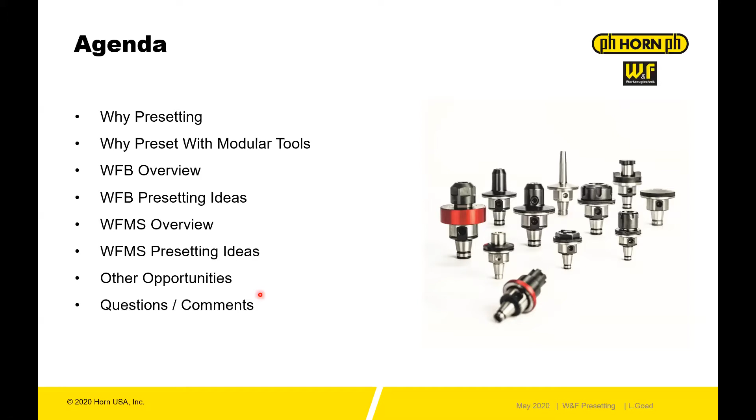So what are drivers that cause tool changes? We've just listed 3 basic ideas. One could be the control of the machine.

When the machine reaches a certain cycle, runs a certain amount of cycles per tool, it can be set in the machine to alarm out and notify the actual operator to change out the tool.

Another one could be surface finish and size. That's typically controlled by the operator. During inspection, he may see some subpar finishes or non-conforming sizes, and he'll decide to change the tool or flip the insert that's controlling that particular size or finish. Another option that could cause tool changes: tool wear detection systems.

The Piezo system is an example of one. With the Piezo system, there is an adapter on the actual tool holder itself in the machine. This adapter is sensing vibration, tool pressure, things that would cause tool wear, or it's just sensing those. Once it reaches a certain limit, it communicates to a smart box, which smart box therefore communicates with the actual control of the machine to notify the operator that a tool change is necessary.

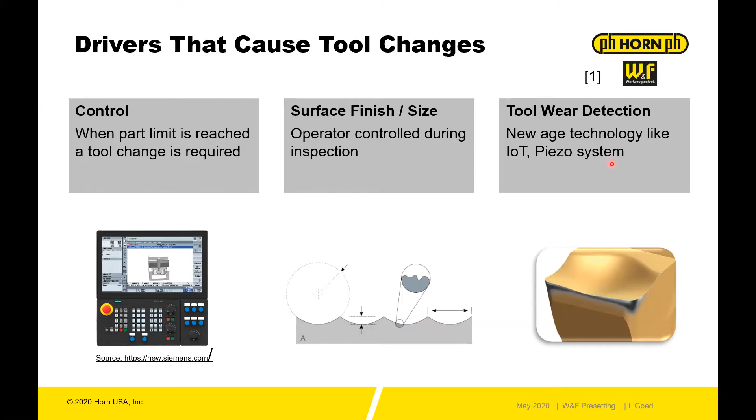What about with presetting? Maybe you have some W&F micro stick tools already preset, and the adapters are available with preset dimensions. A typical tool change from what we perceived would take 2 minutes per tool at 3 times per day, same numbers as far as how many per machine. That would equal up to 12 minutes a day of machine downtime. At a shop rate of $60 an hour, that's $12 a day per machine. Across 4 machines, $48 a day, or $960 a month in just machine downtime lost.

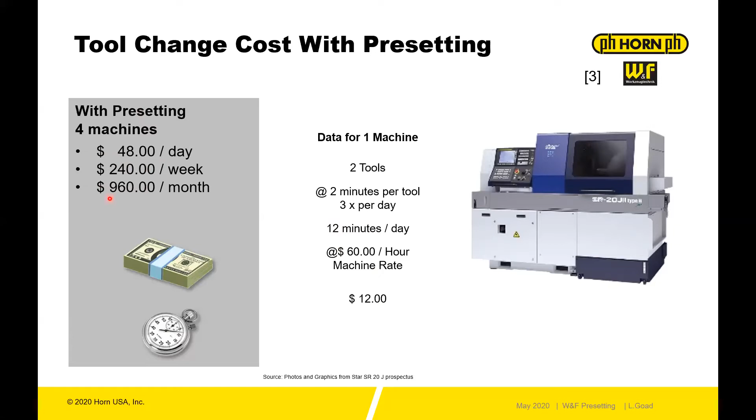So let's look at what you could save by going with a presetting setup across 4 machines: $312 a day, $6,240 a month. This is just the difference between the two slides of without presetting and with presetting, numbers we deemed pretty accurate for tool changes. In time, that's 5.2 hours a day across 4 machines, 104 hours per month you'd gain back in machine uptime. As 8-hour shifts, that's 13 shifts a month a customer could gain back by simply going with presetting 2 tools across 4 machines.

We believe there are distinct advantages with the WFB modular and presetting approach. With the modular system, you only need to clean 4 surfaces on the adapter and 4 surfaces on the basic tool holder in the machine. Versus a stick tool, where you're removing the tool out of the machine, cleaning the wedge clamps, cleaning the pocket where the tool was sitting, cleaning the actual tool itself, flipping the insert, reinstalling, and hoping you didn't get metal shavings or dirt between the tool holder and locating surfaces inside the machine. So there are clear advantages to the adapter, only having smaller surfaces to keep clean when installing, uninstalling, or changing a tool.

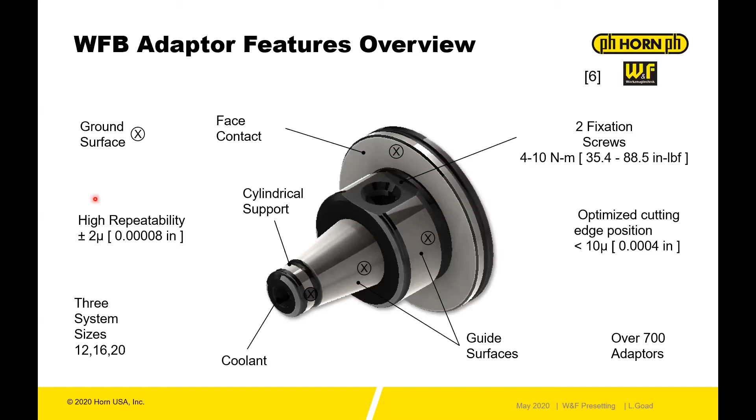We just wanted to show you a little bit of how the process of seating an adapter would work in a basic holder. This area is something I'd like to point out: the face contact area is slightly concave, and that becomes more important when the adapter is seated fully against the basic tool holder.

As you can see, the deeper the adapter goes into the basic tool holder, the more prominent the guide surfaces become for final alignment and proper seating of the adapter itself. Once the adapter is seated up against the face contact areas of the holder and adapter, you torque the threaded taper pins at the recommended value, and at that point the concave face will actually start to flatten out, causing a nice positive locking style clamp. It's also great for exacting and repeatability on the length offset side.

With this, we've put together a little bit of some presetting ideas, and we wanted to cover the WFB first. We gave a simple idea of an ER collet holding any given drill or small end mill, a static holder, a height gauge, a surface plate, and an in-house made tool block. Most customers have round stock laying around so they could turn and grind these surfaces parallel and flat, and then bore a perpendicular bore to the parallel surfaces to the static holder's desired diameter, and clamp it inside this block with a simple set screw.

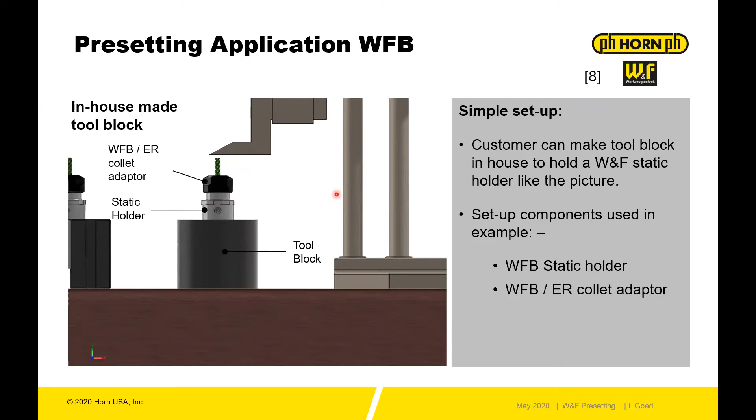Another example would be using a V-block. Most machine shops have a V-block, a height gauge, and a surface plate available. You could simply test the theory by clamping the static holder into your V-block, taking similar measurements off the face contact area, measuring off the top of the tool. Then you're ready to have numbers that can translate to the machine in their length offset, as long as the base holder is set up in the machine.

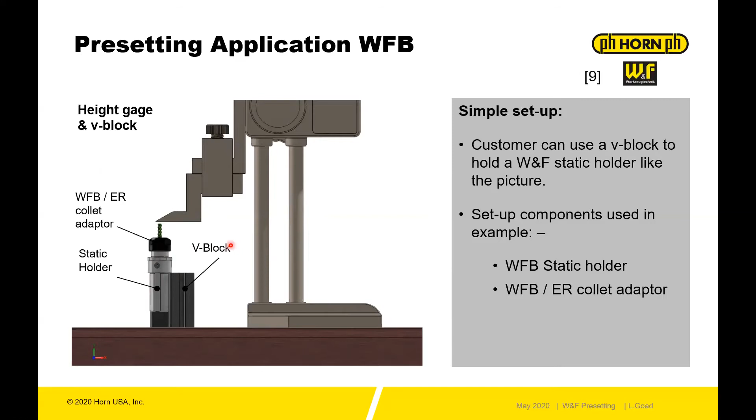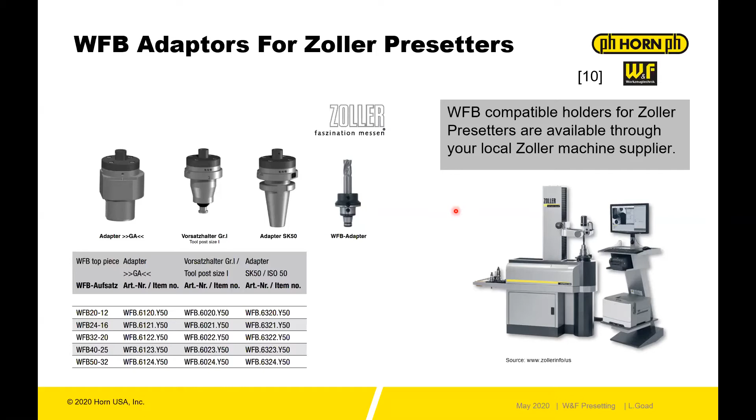You could have a box ready, full and preset with known values of an ID groover, ID profiling insert, ID groove milling, any kind of tool that would fit in a hydraulic holder. So we believe you could definitely save time with having preset tool packages put together, waiting at the machines when the lots are done.

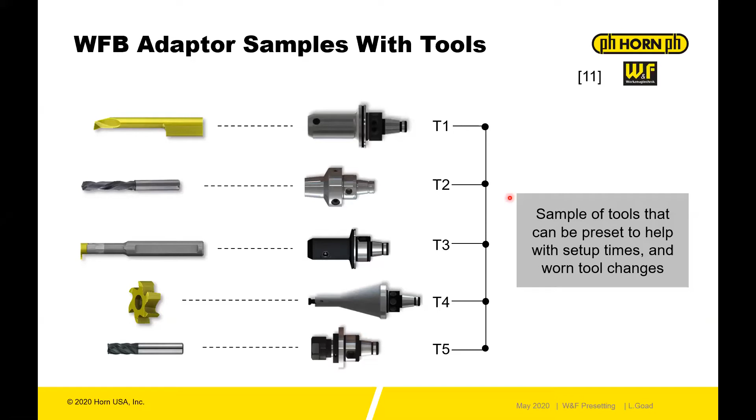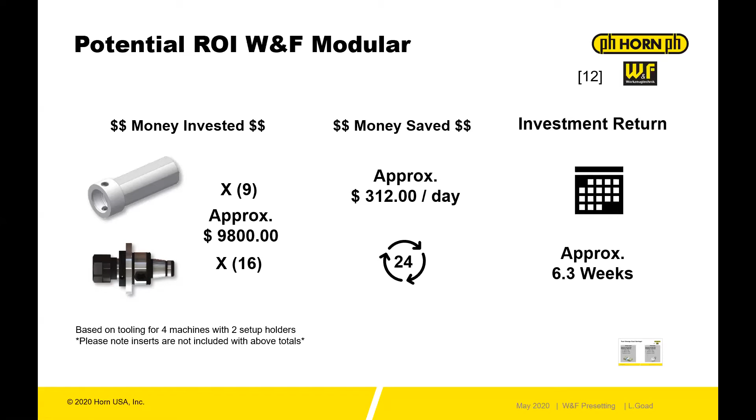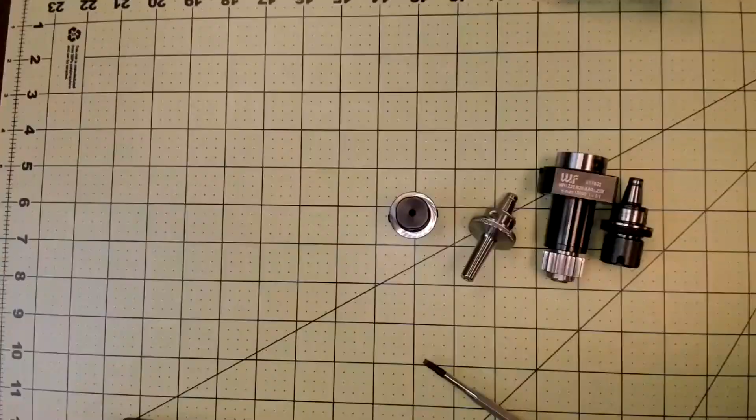Okay, so now we're going to do a live demonstration. All I'm going to do, I know we did this in previous shows, but we're just going to go over the WFB adapter and tool holder basics again, just so you can see them and put together the ground surfaces, and hopefully it will help you understand a little bit more on why presetting is possible with the WFB adapters.

Thank you for bearing with me, I had to do a quick screen change. Right here we have just a basic round shank WFB20-12 compatible tool holder. Some of the features for this are, let's see if I can get this to zoom properly... some of the actual features for this are a through hole, if you can see the hole through the middle.

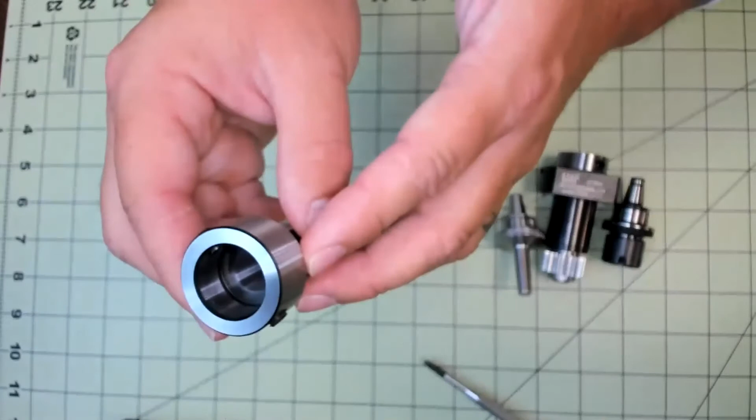Any of the contact areas, like the surface contact area, is ground. You can see the guide surface is ground. The 2 threaded taper pins, 4 clamping flats. These clamping flats will actually help you, let's say you needed to position the threaded taper pins a certain way. You've got options to help put the threaded taper pins in an optimal position for when you change adapters.

Also keep in mind that this style adapter would plug into a standard lathe if you had, per se, a 114 or a 105 face grooving operation that you wanted to include into just a typical lathe.

Another thing I wanted to cover, of course, is the adapters themselves. Again, you can see the through bore. This is a 3mm style shrink fit adapter. As you can see, all of these surfaces are ground.

There's the 2 threaded taper pin bores. And when the threaded taper pin clamps, it actually pulls back on this area, pulling the adapter into the basic holder.

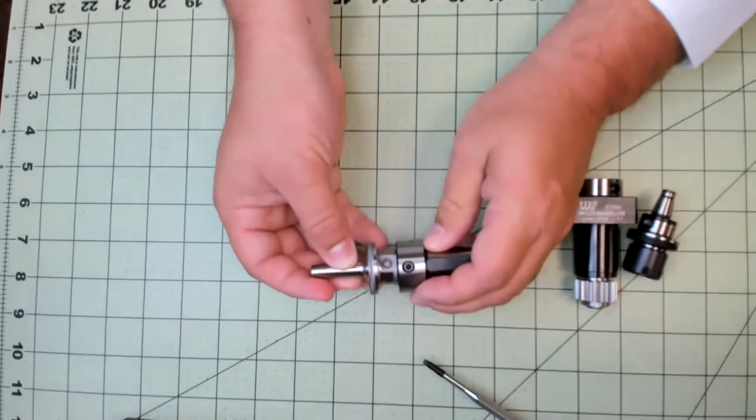Everything's a nice fit. You would snug these 2 threaded taper pins down, as covered in previous presentations, then break them loose once again, and do your final torquing for proper seatment. The WFB 20-12 is 4 Newton meters, so very low torque values have actually produced proper seatment.

Another adapter would be an ER style collet, as you can see, a through bore for through coolant. All the plane contact areas are ground. Again, real easy to install. You torque the 2 threaded taper pins down, and you're ready to go.

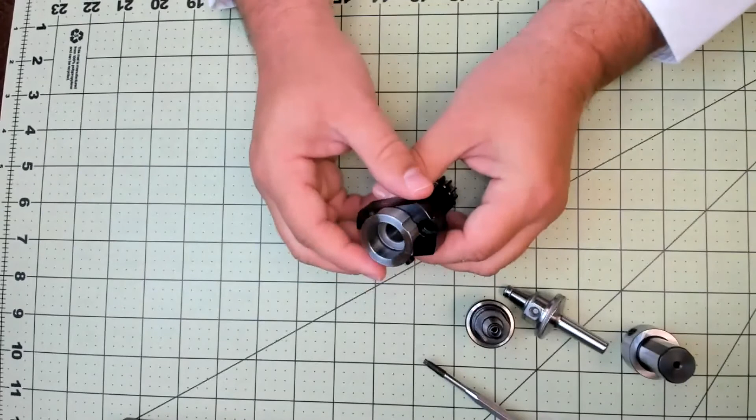One last thing, we believe you should be able to, even with live tools preset, because these are plane ground, plane contact areas, easy to rotate for the 2 different threaded taper pins.

This is for an L20. Let me get it turned the right way. This is for an L20 Citizen. W&F has partnered with Citizen to get the proper gear information, proper bolt hole information, proper flange width. This way you can stack several tools together without any interruptions or having to skip pockets. So definitely lots of good advantages to the WFB system.

Definitely, in my opinion, these are made for presetting.

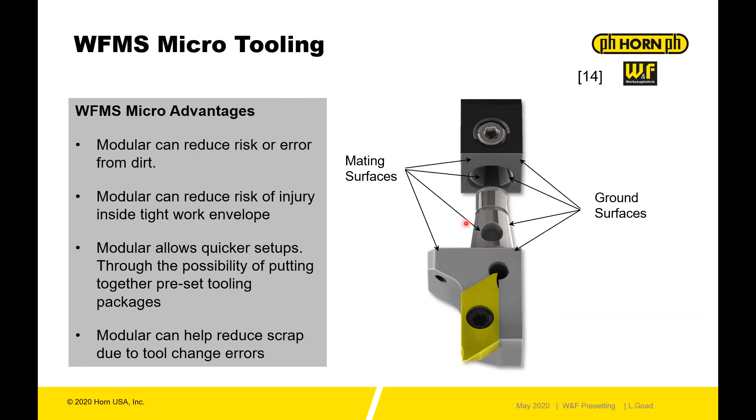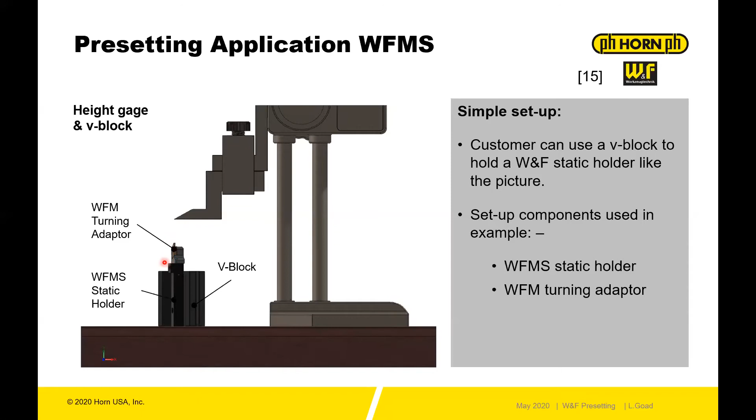So what kind of return on investment would you see? Well, again, this is 4 machines, 2 tool holders in each machine. You would need 9 basic adapters or tool holders - 8 in the machine, 1 outside for presetting - and 8 adapters in the machine, 8 adapters outside of the machine for presetting. $7,800 is approximately what it would cost to totally tool up 4 machines, or to tool up 2 tools per machine.

We believe you'd see $312 a day in return machine uptime. It would take approximately 5 weeks to see a return on your investment.

And where did we get the numbers from? Well, again, if you can remember in slide 4, this was just basically the difference of with presetting and without presetting across 4 machines.

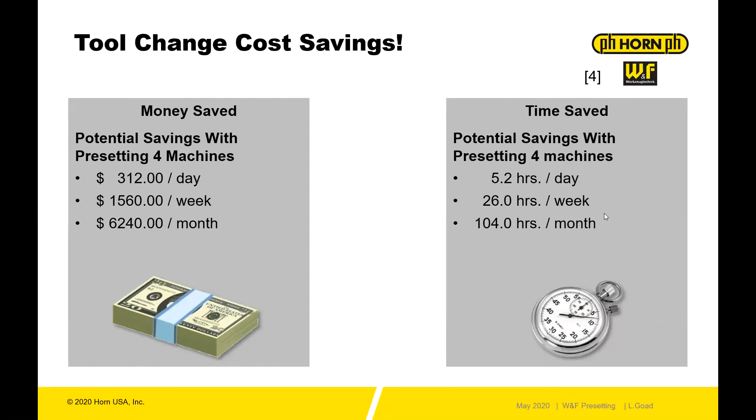Uh-oh, we have hit some technical difficulties. I apologize, let me get to the proper slide. It may be kind of a blur, so if you deal with any kind of flashing light issues, please just bear with me. My slide didn't zoom properly.

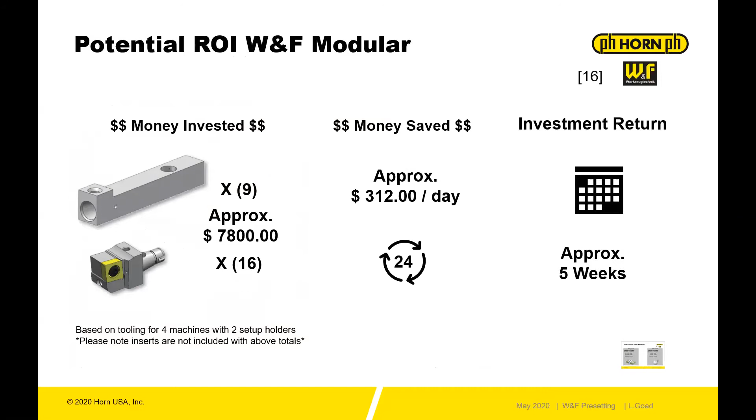But nevertheless, we're back to the presetting. I wanted to just bring you back to this slide for the return on investment so you can see what we would see back in time gained on the machine.

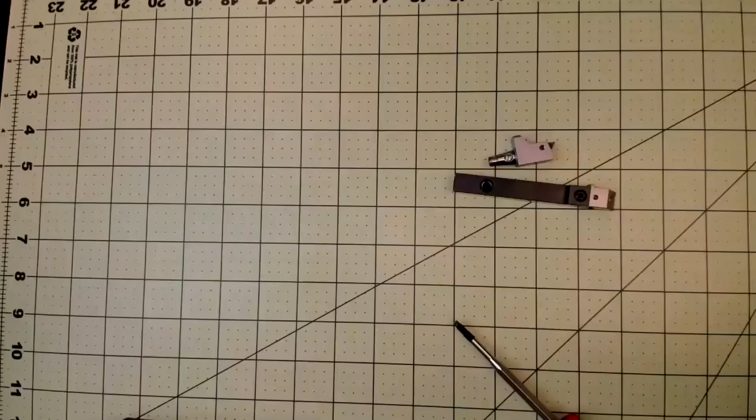Okay, so we're going to take a quick brief break and do a live demonstration. Bear with me as I change my screen share. We will go to my secondary camera, and basically all we're going to do is have a micro tool holder and just kind of show some of the features and what we believe are benefits.

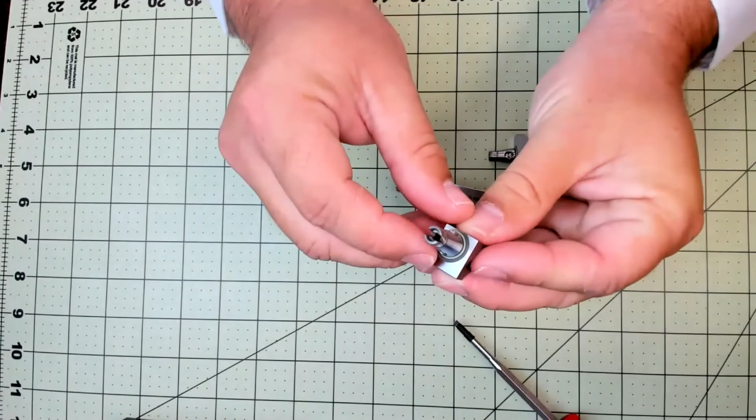Just a basic turning adapter, ISO style. With the adapter, you can see the ground surfaces, base contact, ground surface area. The O-ring itself is to help with pushing the adapter off after it's been installed - it actually helps push the adapter off when you loosen the threaded taper pin. There's the threaded taper bore, and they offer two, so depending on the location in the machine, you could actually flip the insert to be facing down or facing up, depending on your application needs or location of the tool holder.

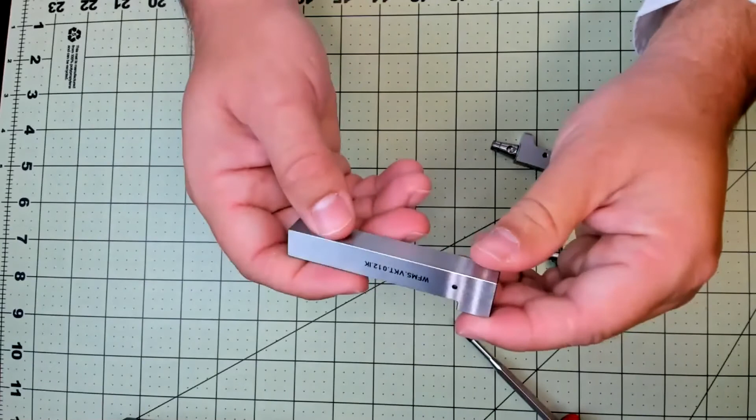The tool holder itself - as you can see, the contact or locating areas that control center height and location of the actual adapter are all ground. There's one threaded taper pin. If you can see in there, hopefully the lighting will let you, but all of the planned contact areas are ground. The slot's been pre-machined to a pretty tight tolerance for exacting alignment on the actual adapter itself, to help with cutting edge position alignment and anti-torsional forces.

But, you know, real simple, nice and easy to use system, easy to change out. Some of the other things I'd like to point out on the adapter itself is with the through bore, you can blow coolant through this hole for through-coolant operation, and the coolant would actually be aimed to hit the optimal position of where the cutting action is taking place. One last thing - with the square static holder, there are two spots for coolant port adapting.

So pretty simple, pretty easy setup. With this, we're going to take a brief break, and I'm going to turn it over to Eddie to see if there are any questions.

Okay, thank you for your questions, guys. So we've moved on to my secondary camera. I kind of took advantage of the time while questions were being answered to get everything set up.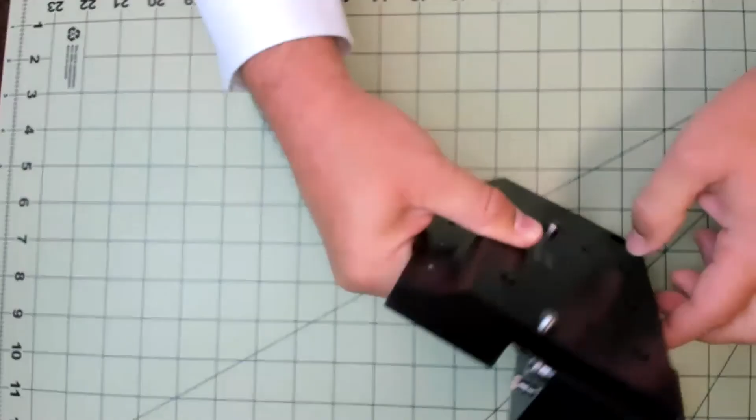So this is a prime example of one of our gang plates. This is for a Citizen style machine, and we've got part numbers particular per machine. I do have a working list of these in case you have a machine in mind.

So the coolant port options, here's 2 coolant port options, more coolant port options. Let me get it more centered. You could move the plugs around and move the adapters where needed, where it's convenient for you to plumb coolant through the tool hole, through the actual gang plate. The knobs here are the through-coolant on and off valves.

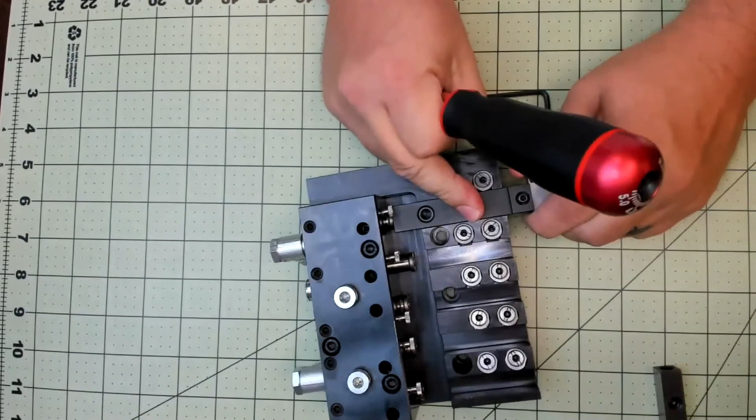This is a micro square style holder with the adapter included. But say you wanted a cutoff tool in your big pocket, well it's just as easy as installing. Torque this down to 5 Newton meters. Now you've got a through coolant option already plumbed by the back side of the tool.

These wedge clamp screws, I believe, are somewhere around 5 to 8 Newton meters. I'll have to double check that to give you an actual real value. But these wedge clamp screws are easy to break loose and remove your tool if you needed. On the back side of the actual micro adapters, you can see we've got an HSK style tube that screws in and plumbs the coolant through by installing into the adjustable adapter. Easy as that, small torque value.

Wedge clamp screws are seated, nice positive lock. You're pushing against a known surface, and you're ready to roll again. So say you just preset off the end of the adapter itself, of the basic holder itself. Now you could, if you needed, actually put an ISO style turning adapter in, and now you're ready to go. All you have is a known value that you preset outside of the machine. That's how quick a tool change can be with one of these. So lots of good options.